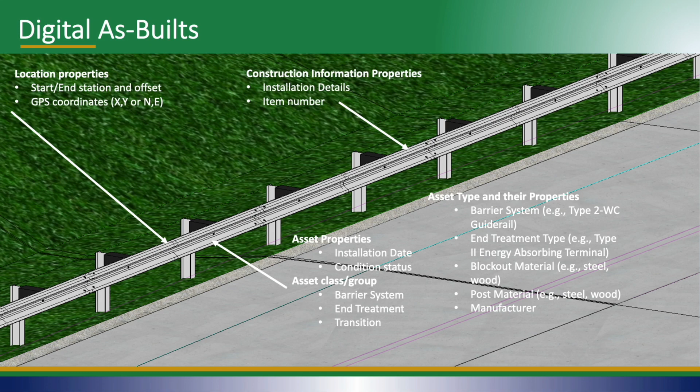The next group of pilots that we are getting into is the existing ground confidence level, also referred to as EGCL, and roadway authoring. This is where we are updating our survey requirements, looking at what those requirements are to produce a model quality level survey that we're going to need to build upon. So you'll hear the term data fusion. Data fusion is where we're taking various types of survey and combining it into one to, again, produce that model quality survey.

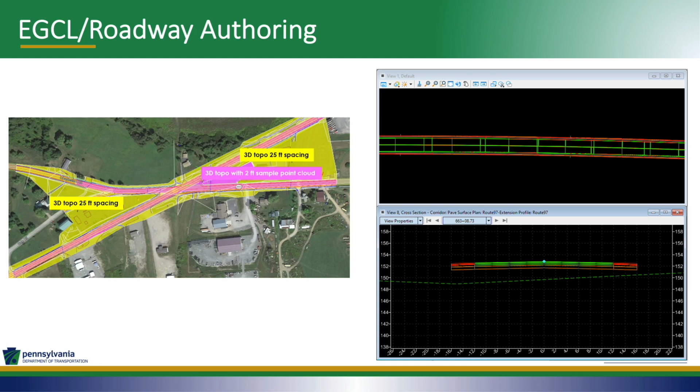There are various software packages that the contractor and inspection forces will be able to utilize. Working with them, we will be able to provide support and recommendations as far as how to use it and walk these projects through as we are advancing these pilot projects. These 3 pilot projects will be in construction in the 2023 construction season.

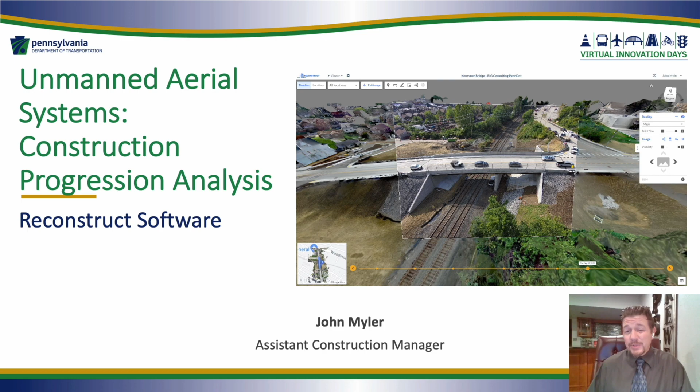Welcome everyone, and thank you for attending today. I'm going to be speaking about unmanned aerial systems and their use for construction progression analysis. In this particular case, we used the Reconstruct software system. My name is John Myler. I'm an Assistant Construction Manager in District 11, and I hope you find this presentation interesting and perhaps maybe useful for you in your own projects down the road.

So, you may be asking, what is Reconstruct? Well, it's a web-based software system accessible via any web browser. And what they do is they'll incorporate various aspects of your project into the system to present you some pretty cool features. So one of the things they'll do, 3D models, plan sets, incorporate those into the drawings, your construction schedule as well, drone flights for project record taking, and I'll talk a little bit more about where those drone flights come into play. And they are particularly instituted into vertical construction at this point, but they're looking to get into maybe some more of our construction.

So they also have a 360-degree camera that you can go around and take photos of a site with as well. So once you have all that information inputted, it can make a viewable 3D model in real-time space. So they can also overlay this with, say, Google Maps, and your project will be located, and that model will appear in your 3D world, for instance.

But also it's able to help us through construction with our progress. So you'll have a construction history, a timeline of details for your project. Again, you can integrate pieces of that 3D model. So if you're going to build piers, you could see where those piers are supposed to go in that real world photograph.

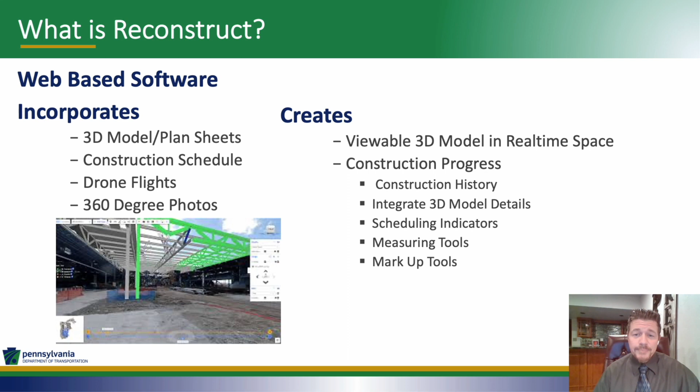And then you also get some measuring tools. So those are neat, and I think will certainly get better over time. And then also some tools to mark up the photos as well.

As I previously mentioned, we're currently using the software on 2 projects here in District 11: the Kenmawr Bridge Replacement Project and the McLaughlin Run Roundabout. At this time, we're only capturing drone flight data. We don't have a 3D model for either one of these projects.

Obviously, we are headed in that direction in the very near future, so I can definitely see the potential of how that's going to play into this software in the future, and the benefits that we'll gain from that as well. And I'll talk about that in a minute, how we're going to at least get the scheduling incorporated into the McLaughlin Run Roundabout.

The other item to think about here is our potential return on investment for these services. We can reduce the need for site reviews, being able to look at the progress of the project from a remote location. You get improved project completion by really seeing how the project is progressing in real time with indicators that maybe aren't there in a CPM schedule for folks to really see.

You also get a good construction timeline. You can snap through those various flights and see how the project has progressed over time. You get some quick calculations for difficult measurements like volumes, and that technology is only going to get better with Lidar scans and things like that over time with the drone flights. And then obviously you'll get some really good as-built records because you can go back and review how the project was put together over its timeline.

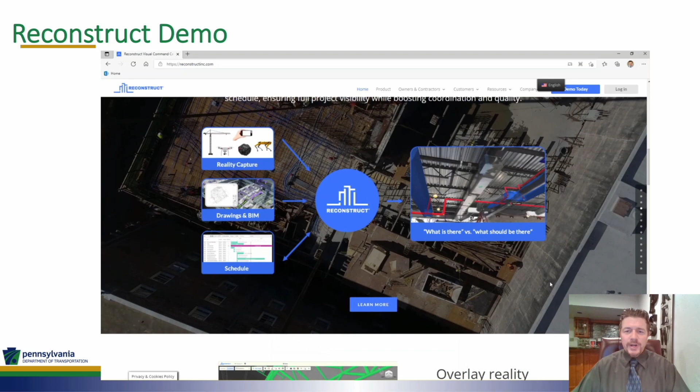Okay, so here we're in Microsoft Edge. There's the website, reconstructinc.com. Anyone can go here now, and they've got some nice videos and demos of their software on their homepage. You can see what it can do with models. They also show the 360-degree camera, and integration with schedules. And lastly, they have their return on investment details and some success stories.

So with that, we'll go ahead and log in. Hit the login button, enter username and password, and log in. It'll take you to your project portal screen. So we've got Kenmawr on the left and the roundabout on the right. We'll start with Kenmawr here. It'll take a second to load. It's a lot of data on the right there. You'll see the indicators of how that data is loading into the system.

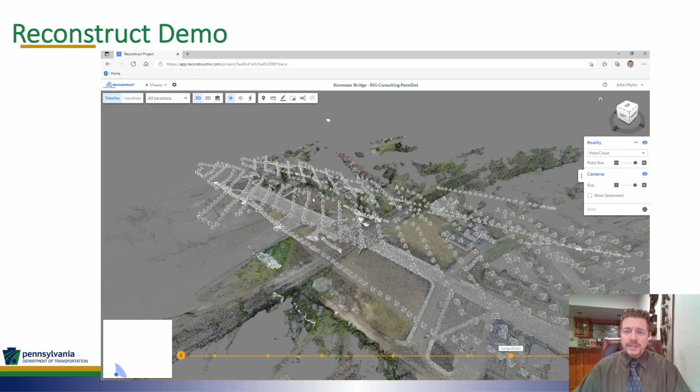Really what it's using is the photo rendering and point cloud system overlaid on the Google map. So here's the Google map on the left showing all the drone flight details. Across the top here, you have some toolbars that you can use, and I'll hit on some of those items. With that, let's zoom in. So here you can see a photorealistic 3D model.

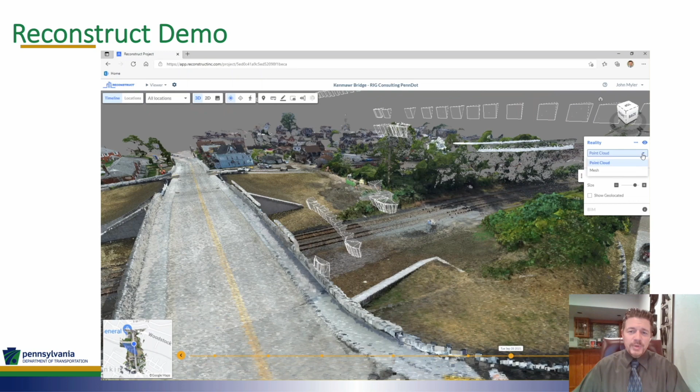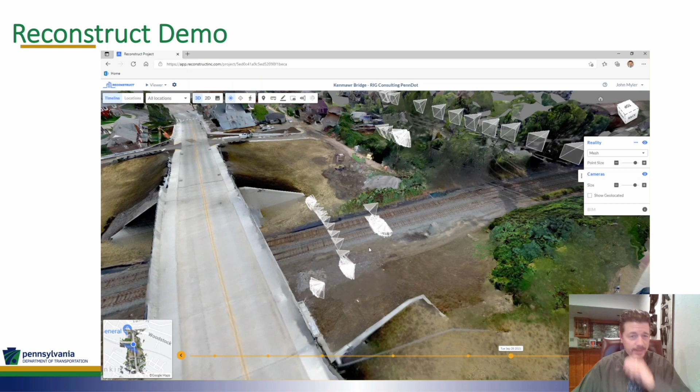Pretty cool stuff. The project was almost complete at this point. We're nearing completion now. There's also this mesh form, so it can take the photos and overlay them on surfaces to make it a little more photorealistic. So it's nice information there as well.

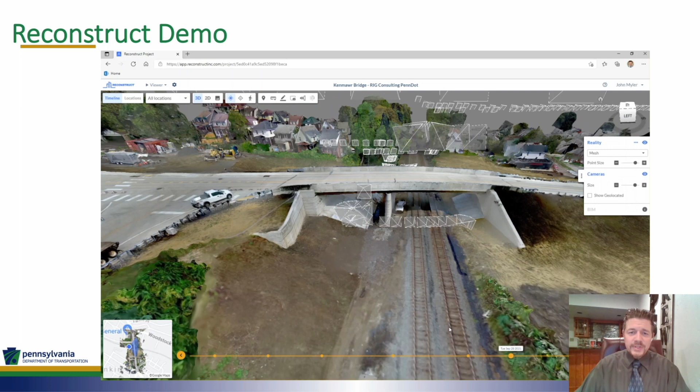These pyramids are actually high-res photos taken by the drone. In these photos, you can zoom in on them. So here you can see very high resolution, great quality photos taken from the drone flights. That's what it uses for some of that mesh overlay to make it photorealistic. So again, different angles, things like that, it can turn out pretty nice.

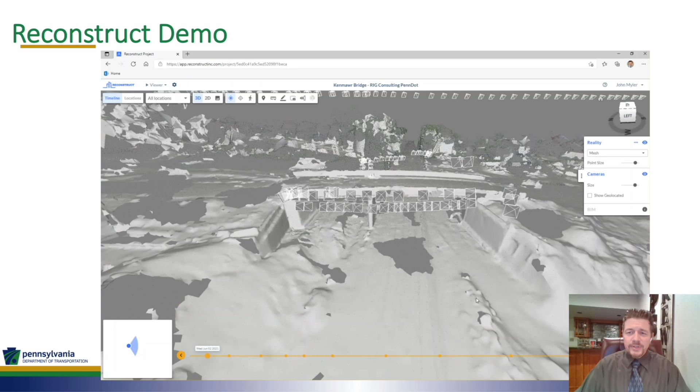Also across the bottom here, you'll see all the different yellow dots. Those are the different drone flights over time for the project. I'm going to go back here to June. That should work. So in June, we were just wrapping up completion of the bridge, getting ready to open it to traffic. Let's see here, the mesh doesn't look good. Let's do point cloud.

Okay, let's pan around here. So there was a temporary bridge, an Acrow bridge we used next to the new bridge. That's now gone. Let me go back to, let's see, February. That should work.

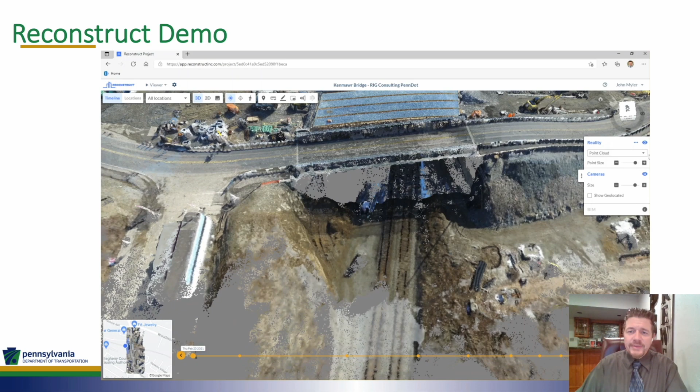So here in February, you'll be able to see the Acrow bridge next to what's going to be the new bridge eventually. We had to maintain traffic throughout construction. So again, really kind of cool photos here. Again, you can see material on site, equipment on site, good information to have throughout the life of the project.

Try the mesh here. Yeah, I don't think the mesh likes the temporary bridge. But something else here. Let me fly over the bridge, show you some details on that as well. Let's try this photo. Nah. Try it again. No, let me try another one.

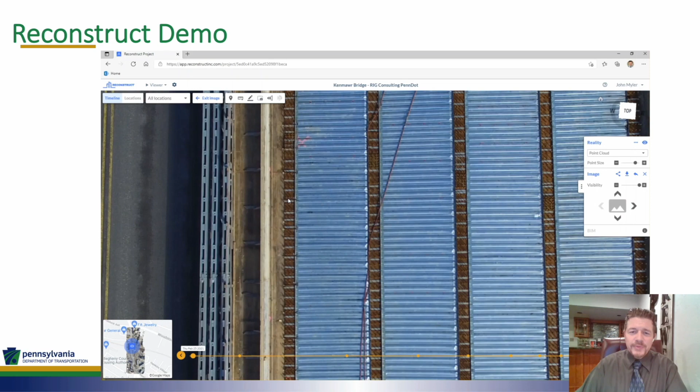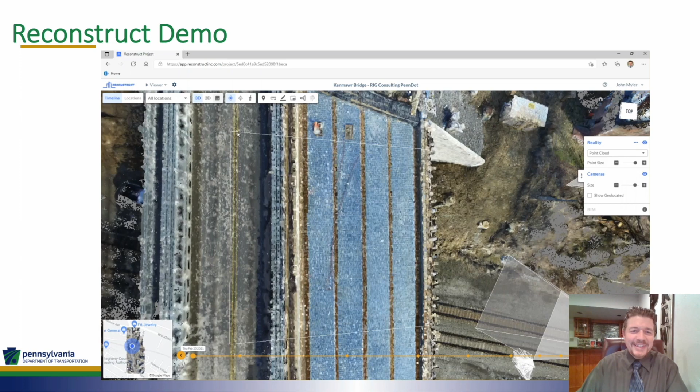There we go. Okay. So here over top of the bridge, again, you can see the detail. Those are the straps for the tension zone of the bridge. You can really kind of see that. Don't be scared about the rusty top flanges there. It's Cor-Ten steel, so we didn't miss something there on the project. And then the Acrow bridge next to it as well. It's really kind of some cool stuff there.

With that, scroll down here to the side. I'll show you some of the markup tools that we have. Here we go. So you get a little toolbar here with various colors and shapes and freehand items you can draw on the model and photographs. You also get a text block here, so you can put text in if you need to. So that's some cool stuff there.

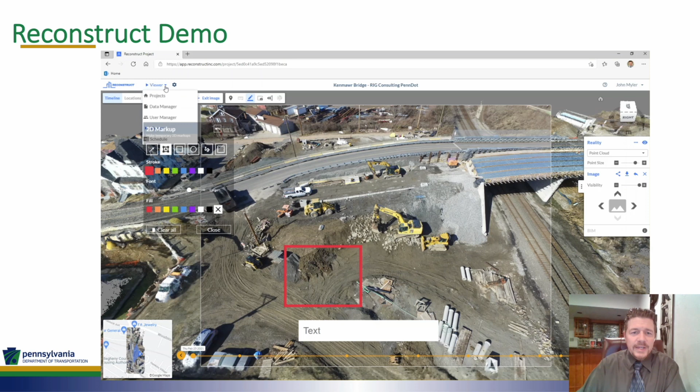And then also, let's see, here it is. So also you can just zap right to the image and it'll overlay that stuff in the image for the area that you're at. It'll find the closest one. So again, kind of a cool little tool there for you to use. Measuring, I'll show you on the next project, and let's just switch over to that now. So projects, okay, roundabout.

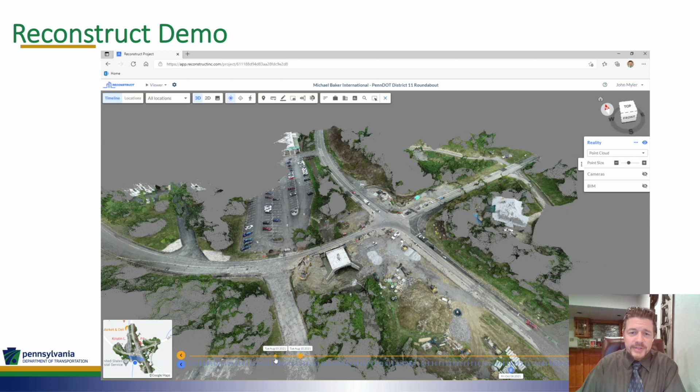So this project's very early in construction. We actually only have 2 drone flights at this point, but we're going to continue on here for another season. So we'll have a lot more flights as this project progresses. First flight. So this was right before we were setting a Con/Span, and then right after we set the Con/Span over a creek. Again, you can kind of see how this is all overlaid.

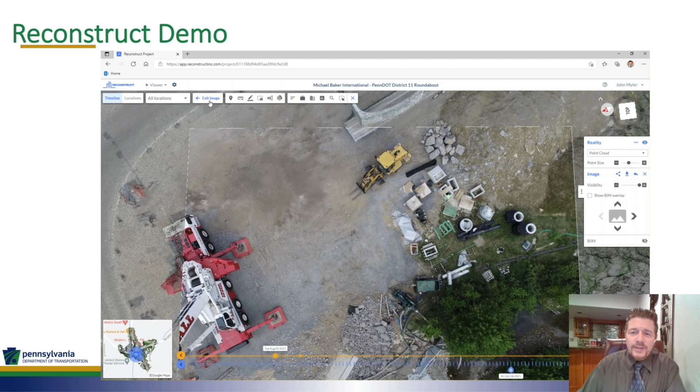Again, the map on the left side, and we have specific locations through here that are actual surveyed hard spots that don't move, and that's going to help us with the measuring that we didn't have on the Kenmawr project. Just flying in some photos here. Again, you can see the high quality, and you can see materials on site, equipment on site. See the arches over there on the far side.

Let me see if I can get the mesh. Might not work here because of the stone. Let me try going to the second flight maybe. Yeah, I don't think it likes the mesh here. Get the point cloud, try one more time. Yeah, okay, mesh doesn't want to work. So let's just go back to the point cloud.

I'll show you, there's a stockpile there. I'll measure around the area of that stockpile. So click the measuring tool. Here's all your measuring tools. You can see various items that you can use. One of the nice ones is going to be that cut and fill volume. When we get more survey data as the project goes on, we'll be able to even see the volume of this pile. So here you can click multiple points.

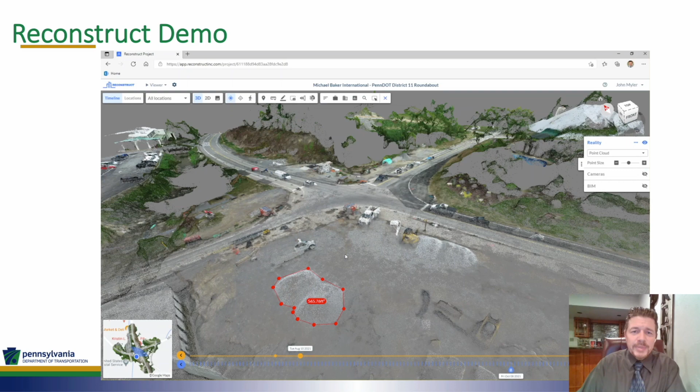It's going to grab all those points around here and give us a square foot of it. So there you go, nice quick little feature there to get that measurement. Let me go up and exit here. So there you go, there's your total square footage for that little stockpile there. And that stays kind of on the screen, so it's nice. You can pan around and it won't move away for you there.

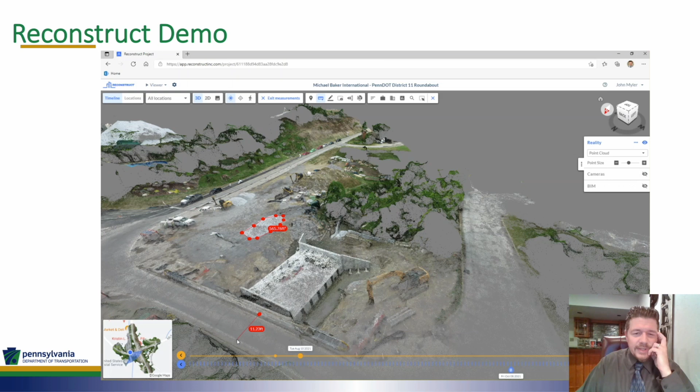I'll try and take a measurement over here. That should be good. Let's go ahead and measure the width of the road. We had a single lane alternating traffic. So this is a narrow section of roadway here, just over 11 foot. So yeah, you can see just over 11 foot there. I might be off the barrier a little bit, but again, nice little measuring tool. Just for information, if you want to grab a quick measurement, you can do so on a project.

Okay, you also get your markup tools here. So just like on the other project, we can mark things up if we need to. So that's nice. What else? Timeline. Okay, here down at the bottom, this blue indicator, that's going to be our schedule. So we're starting to load a lot of that in now to use that to progress the project through construction.

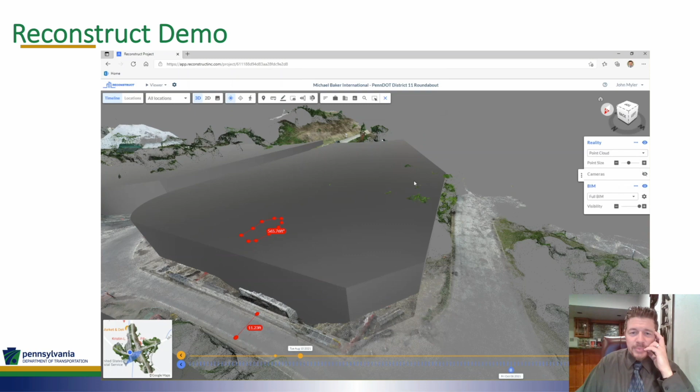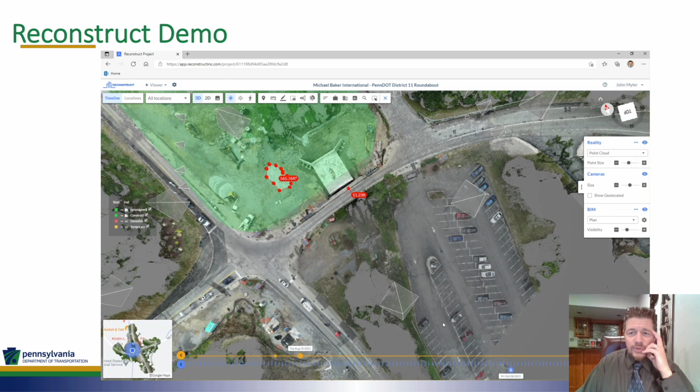So as I lay this over the plan, there it gives you an indication that we're on schedule. So the green shows we're on schedule. And obviously, if we weren't, that would be shaded red, showing that we're behind and where we should be moving forward. So again, nice way to show you how your project is progressing.

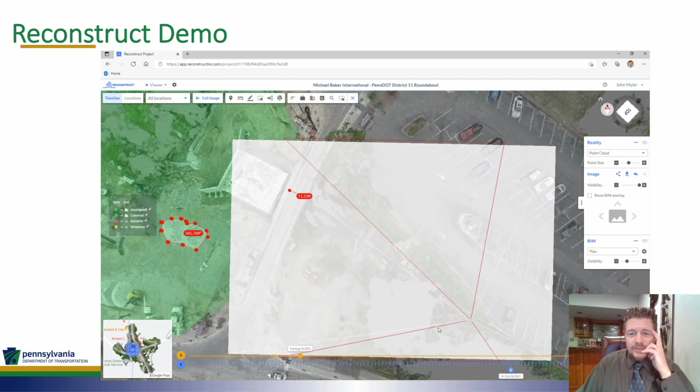Again, turn on the cameras here. So again, those pyramids, we've got a bunch of high-res photos. Let's see if I can check that measurement again. So even in the high-res, you can zoom in and take measurements there as well. So let's see, try and get white line to white line here. Yeah, so looking, again, we had 11-foot lane, so you have probably 10 foot between white lines there.

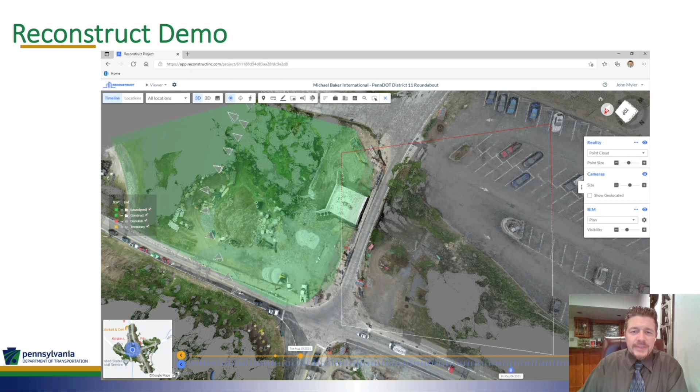So again, cool tools to use. And again, I think once we get some more flights in, we'll be able to get better survey data for measuring volumes of cut and fill and stockpiles. So look forward to that.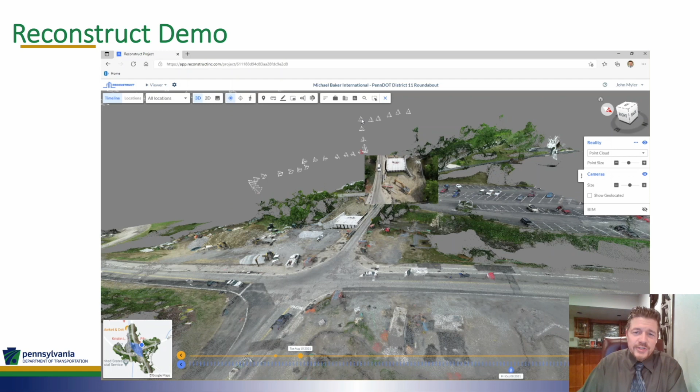Just finally to wrap around here you can kind of see those pyramids. That's the flight of the drone as it worked its way around on that given day. And you can see the elevation changes and the location changes as it goes around. Click any one of those photos for use. Sorry if some of those are kind of small to see doing that, but again, I think we're going to have some great potential coming out of this in the very near future once we go planless.

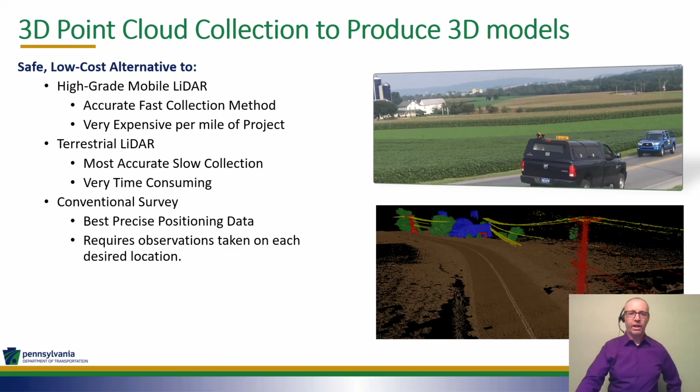The reason we're looking at this, we now collect a lot of LiDAR on the roadways, but we use it with really high-grade mobile LiDAR systems through our consultants. Those units can cost up to $1 million to purchase, and they're very expensive for us per mile for data collects. We could also do it through terrestrial LiDAR. It's going to be even more accurate, but it's very time consuming to move those terrestrial LiDAR stations along that roadway, collecting the data you need.

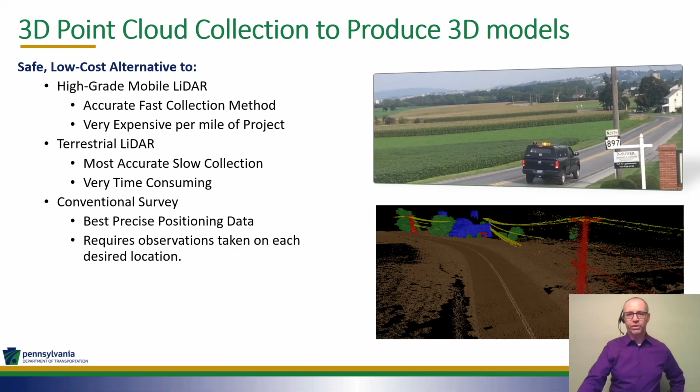And of course, another thing that we're looking at is utilizing conventional survey, but keeping those surveyors out of that roadway, right? Keeping them off that double striped yellow line, off those road edges, and really try to utilize the technology to keep our surveyors safe and get their services for the off-road data where LiDAR really struggles in vegetated areas.

As part of our SLAM evaluation, we also wanted to look at 3D point cloud collection for digital as-builts. So in the image you see to the upper left, that's a roundabout that they built for a new welcome center in District 5. We were able to utilize that ZEB Horizon scanner by hand, walk around that roundabout, pick up the details. I mean, you can see the paint stripe, you can see the center, and of course, we'll be able to rotate around in 3D and see all the details in there.

We also were able to collect on a steel girder bridge. We've been requested through photogrammetry to do many captures of historic bridges specifically with our terrestrial scanners. And it's very time intensive to move those scanners from position to position to try to get all the details specifically in those steel girders. So with this hand scanner, we're able to take that through and basically paint what you see. You're able to move it around and paint and get that superb detail that you see in there.

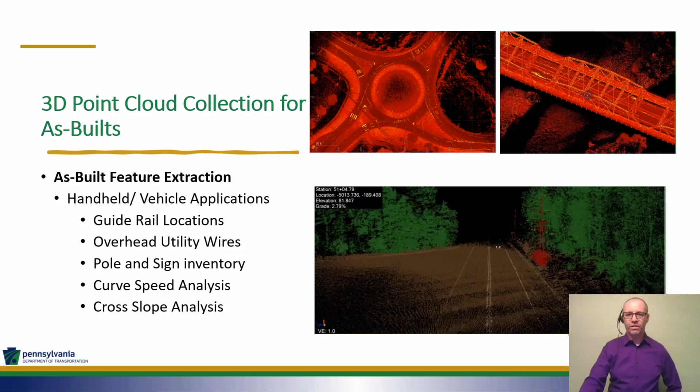So as this animation continues to roll through, you'll see a little icon of a surveyor standing in the middle of the road. And again, one of the things we're going to do is utilize this for safety. I think it's really easy to see how driving these through the roadway is a much safer alternative to having personnel standing in the middle of the road.

And the third aspect we want to look at is 3D point cloud collection for asset management. So we were able to take that scanner down to Fort Hunter State Park in Harrisburg, and you can see in the photo in the upper right a covered bridge down there. And we're able to take that scanner again, handheld, walk through there. You can see the details in the image below.

That's actually the point cloud rendering that we're able to produce. A lot of detail. It can get a little bit artistic with these. One of our technicians did, and also in the animation that you see that's running now. Okay, and we're able to walk through there one time, one complete scan. If we were to try to collect this with our terrestrial scanners, it would take many setups to show the details of those beams and to get everything collected. The SLAM technology really offers us a great opportunity to move through here once and done and get the scan that we need.

Another asset that we looked at was a culvert in District 8. So as this animation kicks off, you see we were able to scan on top of the ground, show all the context that's needed to be there, utilize that to geolocate, georeference this scan in space. As they tilt up, you can see the culvert run under the road. And with our software, we're able to cut away then all that roadway surface. And you can see in the image to the left how you're able to cut away that culvert to see the detail. You can see those pipes. You can look in there and see deterioration. A lot of detail comes out of that. On the unit too, there's also a video scan that occurs while you're collecting the scans.

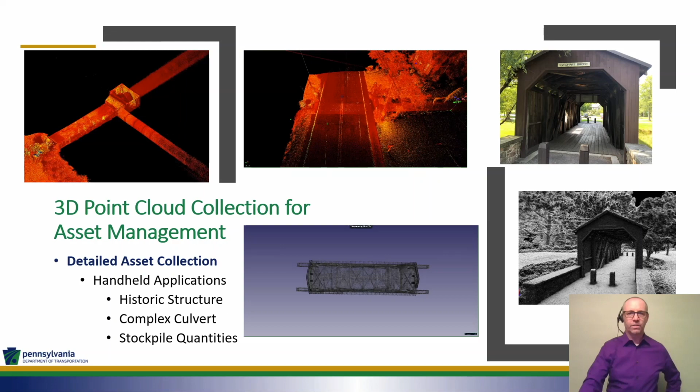So we saw some really great advantages to this scanner right off the bat. It's lightweight, easy to use. We can mount it to a vehicle. We can transfer it between survey crews or even different departments depending on the applications. We can access hard to reach environments, or as you see here, this is a railroad crossing that's moving now. The detail you can get on something like that.

This is that welcome center up in District 5 that I had mentioned. We actually walked the outside of this and a bit in through an outdoor eating area. And you can just see the details that the SLAM is able to pick up. The last animation is of a pedestrian walkway. We scanned that by hand. And again, you can take these scans, you can georeference them, you can pull them into your projects and be able to have a really good detailed digital as-built of what's there.

So as part of the evaluation, of course, there's some limitations that we ran into. The unit must be utilized, whether handheld or vehicle mounted, in a closed loop scan. And those scans must be limited to about a 20-minute duration. And as we were putting the scans together, we saw some of the point clouds getting some divergence or drift. So in the image to the upper left, you can see how the bottom scan is actually what we want to see. And as part of that drive, we started to get some drift in that upper scan pulling away and lifting away and moving off to the left.

It really requires a vertical feature-rich environment. So poles, signs, buildings, and even that tree canopy actually is a good feature. We didn't realize that at first. I thought that would be a little noisy and poor, but actually those trees help out a lot.

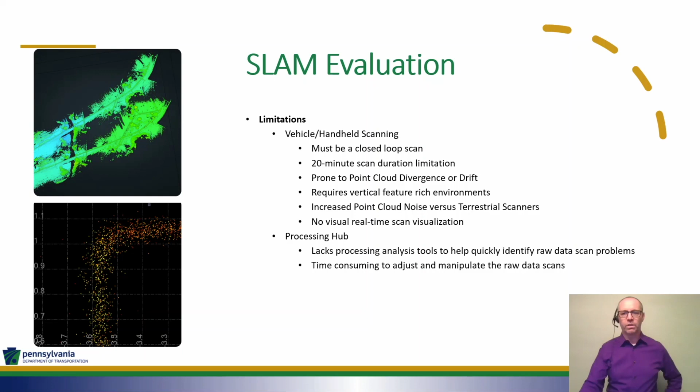So we're submitting our findings for the FHWA SLAM evaluation now, but we also want to do some explorations of some other types of LiDAR and do some true comparisons to these. One of those being the Kaarta Stencil Pro. We've had them out for a demo. Topcon was able to bring out their RDM1 unit. It's a downward facing LiDAR scanner. And we're hoping to set up a demo with the Trimble MX50. So, what is driving all this?

And the thing that's driving it is this new 3D digital delivery directive for 2025. And we're being tasked on the survey unit to provide much more data-rich, dense data sets, so that when you're doing your 3D modeling and your 3D design, you have that good dense terrain built from your survey.

The other thing is personnel safety. We want to keep everybody safe out there, and if we can do it through mounting these onto vehicles, collecting those roadway surfaces, we can utilize our survey personnel on the off-road data collects, getting those drainage structures, showing the ditch lines and the swales, and other things that LiDAR just does not do a good job with, especially in vegetated areas. So we want to best use our personnel and be able to deliver the products that we need moving into the future.

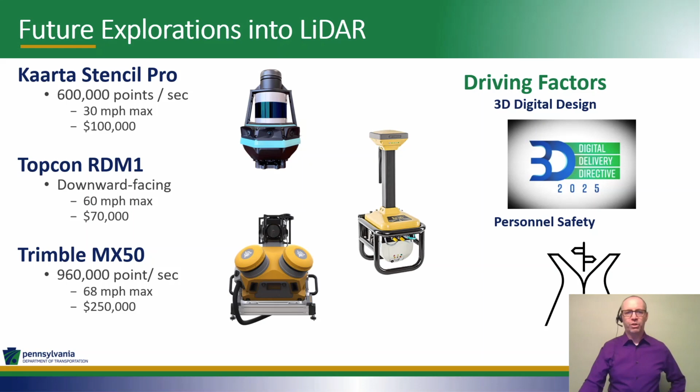The second part of this presentation, we're going to look at the Trimble X7. We were able to purchase a Trimble X7 through the Productivity Improvement Fund through PennDOT. It's a full 3D scanning system. This one has an 80-meter range with a very low noise level. So this scanner is getting back direct returns.

You're not seeing that 1/10 of a foot noise range. You're going to get 2.5 millimeters at a 30-meter range. If the scanner's 30 meters from that wall, you're only going to see divergence of about 2.5 millimeters. It collects at 500,000 points per second, and has a very tight relative accuracy of 2 millimeters. It has some mobile software called Trimble Perspective we're able to use in the field, and we're able to do our data analysis through the existing Trimble software that we have in-house.

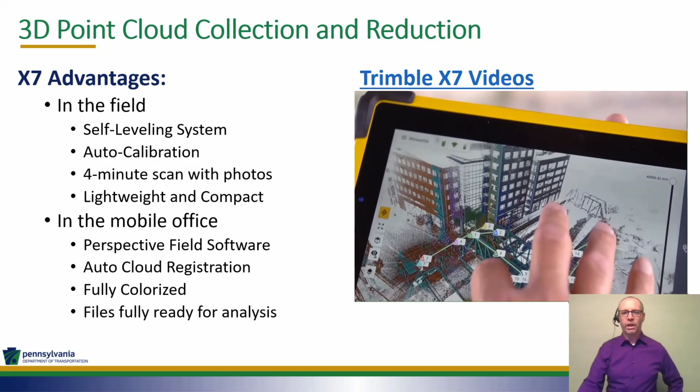So just looking at the 3D point cloud and reduction with the Trimble X7, I actually borrowed this video from the Trimble website. It'll show you the X7 and also some of the results and some of the field applications. But our main reason for acquiring this, it's self-leveling and auto-calibrating. So we can take that unit, go and set it up, press a button, it auto-levels and starts scanning. It can pick up your full 360-degree view scan with photos in about 4 minutes. It's lightweight and compact, easy to move, easy to utilize.

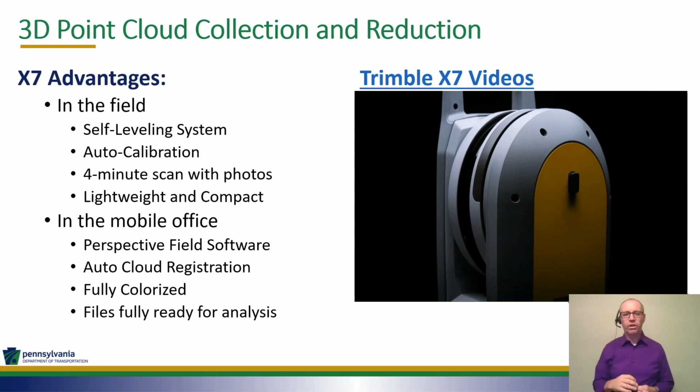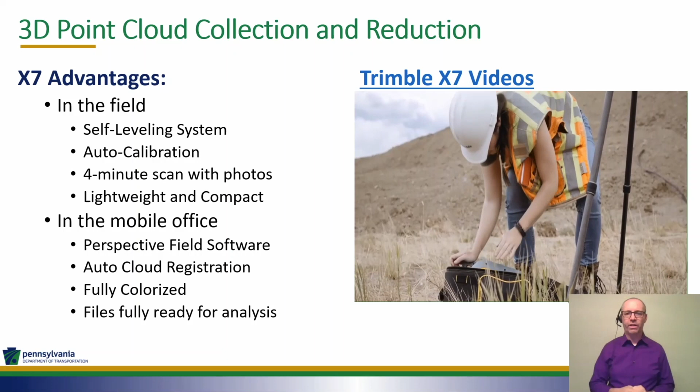In the mobile field office, like I said, on a tablet, we'll have that Perspective software. We can auto-register those clouds in the field. We can colorize those point clouds in the field. And the files that we have at the end of the day are ready for our analysis. We dump those into our other Trimble software products, and we're able to go and start analyzing those MSE walls. It's a great time savings for us. Great, again, on safety, keeping those folks in safer positions, being able to carry that lightweight scanner, much better than the old scanners we have typically been using on those collections.

So typically for workflows for this, we establish some horizontal and vertical control on those sites. We do preliminary base scans. And then in accordance with Pub 238 and our own Pub 122M, we do these in-depth inspections about every 10 or 15 years, depending on the wall. We then document and report any separation; you can see if those panels are moving in any way. You can see if the wall's moving.

We can do that through heat maps, cut and fill maps. And we're also exploring some other simpler deliverables, like Excel reports, that we can give directly to the bridge unit and those that are actually analyzing these.

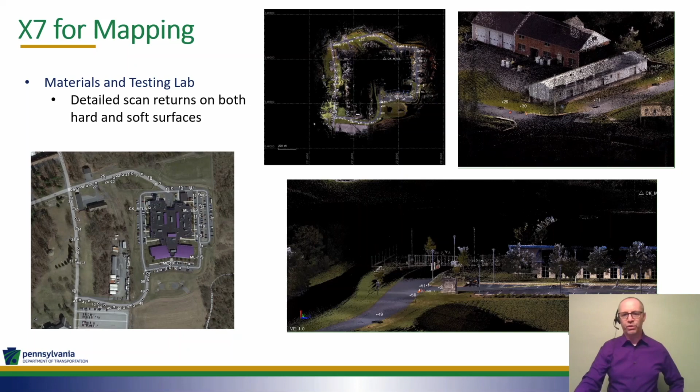This went very fast. At those 4 minutes per scan, they were able to go the whole way around the building and all the access roads where you see those numbers indicated, collect upwards of 50 scans in less than 1 day. Again, they're auto-registered, they're colorized. They want to move those into our other Trimble products. We can pull out the surfaces for those roadways. We can see the details in the buildings and any assets that are around it.

We very quickly realized benefits as soon as we got the Trimble X7. It's 50% lighter, more compact than the previous units we've been using. So we can really get that in and where we need it, keep the surveyors out of harm's way. It collects a large range of data, so we can be up close to that wall or pull back from that wall, however we need to get that. It's auto leveling, fast data capture, reducing our field time dramatically on these MSE walls.

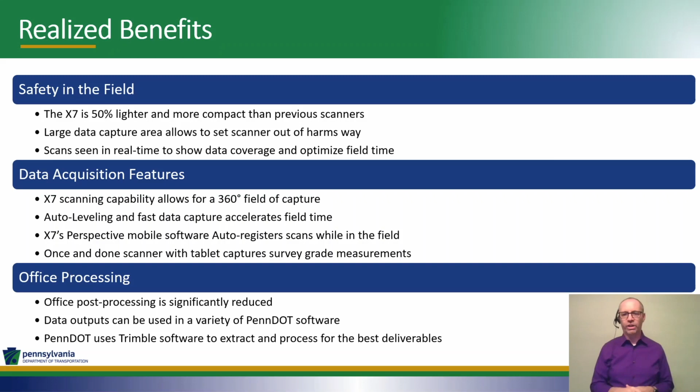The field software that we have on there, again, auto-registering those scans saves a lot of time back at the office. We know what we have right there in the field if there's anything extra we need to pick up. It's a once and done solution. The office post-processing, again, the amount that's done in the field, we then bring those LAS point cloud files into our existing PennDOT software to start that analysis, comparing those original scans that we got 10 years ago to the scans that we're getting today to detect any movement that may be occurring out there.

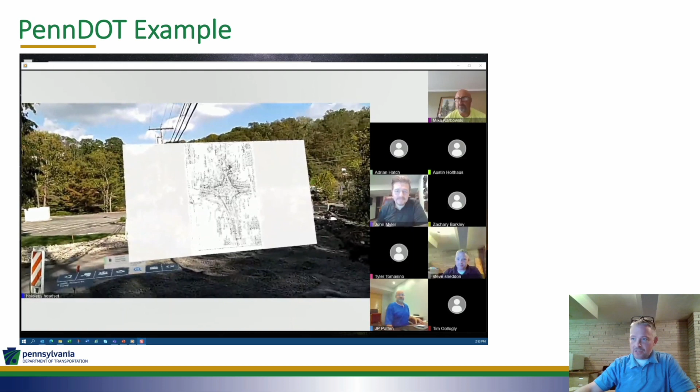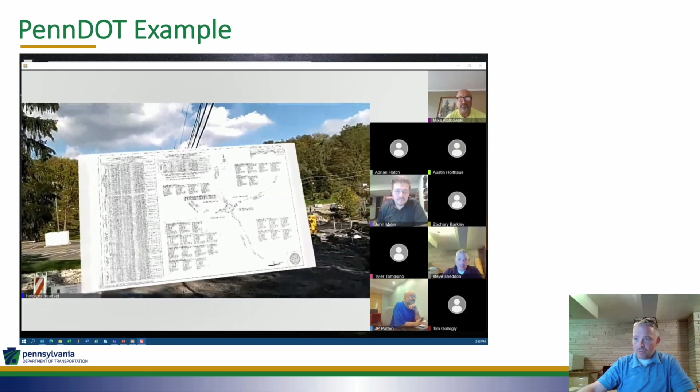30-25 station, looking station ahead towards the roundabout. North is to my left currently as I'm standing here. Just to give you alignment. So you want to shift to the next page?

I'll add one thing here. The audio is a little rough because he was shielding his eyes from the sun, not realizing that he was inadvertently blocking the microphone. So we learned from that.

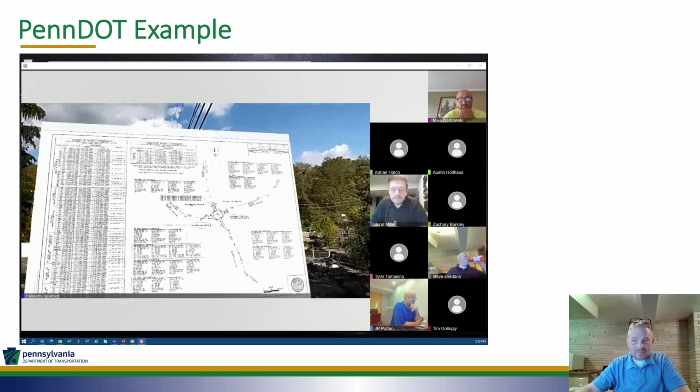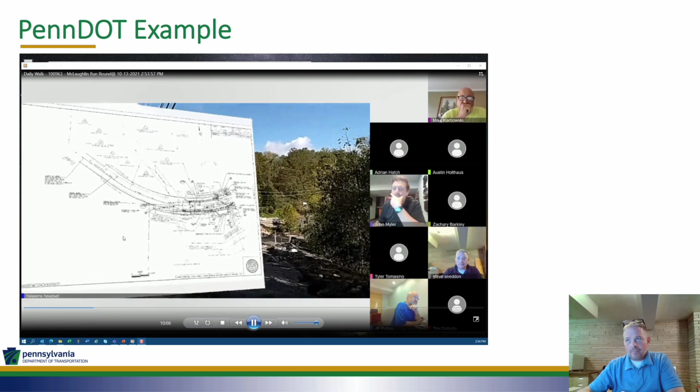So here again is our baseline, 3124 on my pointer. I'm about at 3125 on my pointer. And our targets up through here of discussion. You see the side road on the right of this plan set here. We're actually going downwards. That's actually a post office entrance. Pretty active. It's actually the most active post office in the county, probably. So many people come in and out of there. But that's kind of where I'm standing, right at 3125.

That's right there. So anyway, you can see what this looks like. You have the participants on the right live with the gentleman in the field with the plan set actually on site, sharing live information amongst ourselves. I'll try to get into a little bit more of the detail in the next slide.

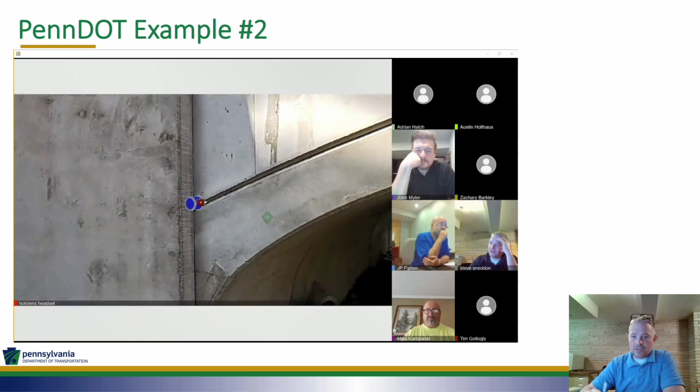Again, is it roughly 15? Okay, so here we are. We took the HoloLens, the AR HoloLens, down by the bridge, and we're going to show you a little bit more of the functionality here.

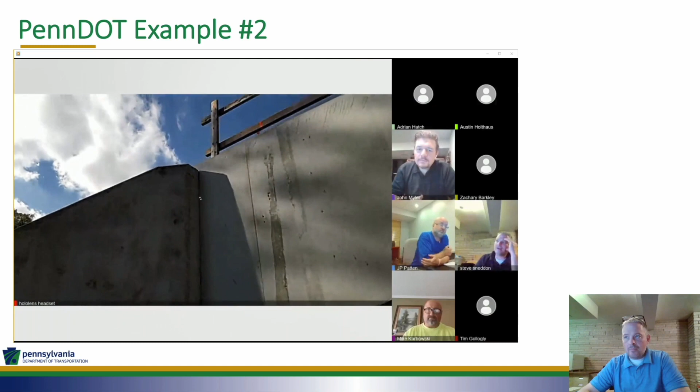Feet. Yeah, it's a 15-foot diameter, so about 7.5 to 8 feet in front of you, and then it'll remember that map around it up to about 100 square feet or so. So that's what we are pushing up bigger. We're making that map it builds over time larger, but it scans in front of you in about 7.5 feet, and it'll remember that, up to about 100 square feet.

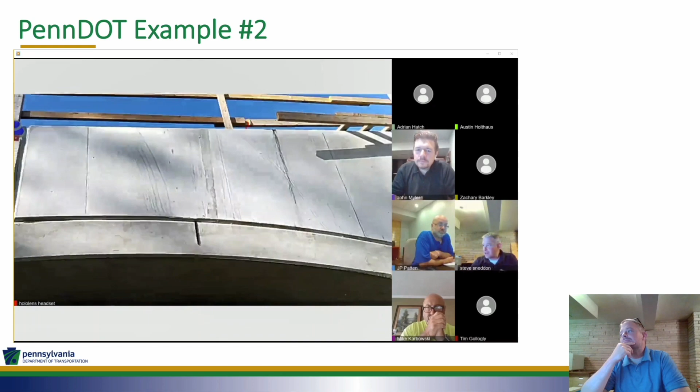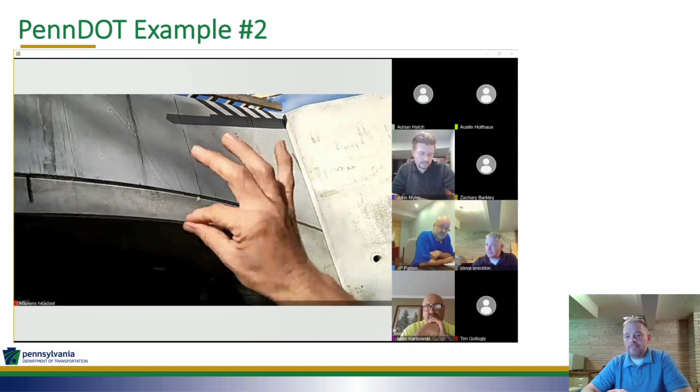So as he walks around the site, it's not storing the entire project in a 3D LiDAR model anywhere. Yeah, not yet. So you can think about it as it's grabbing a snapshot of the job around him in 3D. So when we hit the upload on this, we'll see how much of the bridge it caught.

Okay. So now for him. What you just saw was Mike was trying to snap some photos, or drop some pins, but he wasn't quite close enough for it to work. So that's one of the shortcomings as of now.

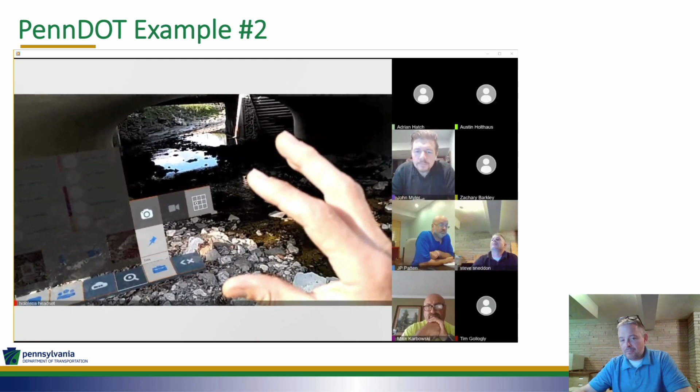To snap a LiDAR image right now, what's he have to do? Look at the bridge and click on the grid? Doesn't even have to look at it. So everywhere that those pins are, that's all going to get captured. Dropping a pin tells the headset, hey, keep track of where I just placed this. Because it's going to keep the markup accurate even on places where it doesn't have that in its immediate memory.

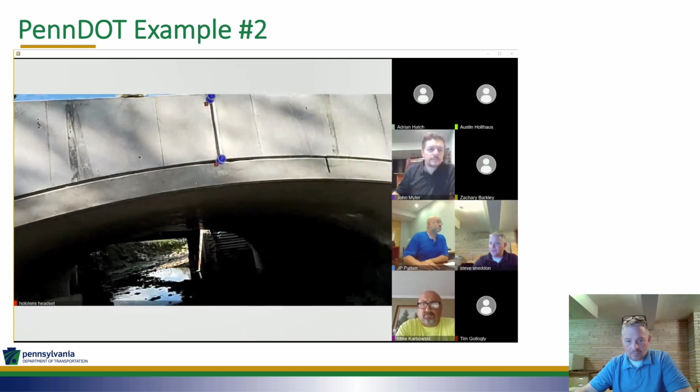So this is convenient. It drops the file right in the chat box. So I can just click on that, right? Yep.

Although I think that might try to launch you out of the call. Yeah, it tries to take you out. Yeah. I have to save as. That's a good note, though. We should make that download instead.

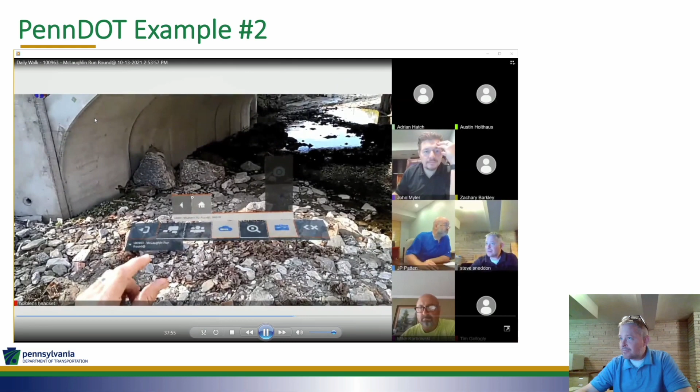And if you take a look at the folder, I'm going to turn your attention. Take a look at the file sizes. The first one Mike took was only 280 kilobytes. The one we just took is over twice as big, and it's got that whole front area of the bridge where he just put the push pins and all the dirt behind him where he was walking around. So if you were to walk down that bridge, drop some pins on the underhang there, get a good look at that, it's going to include that underside as well as all that terrain.

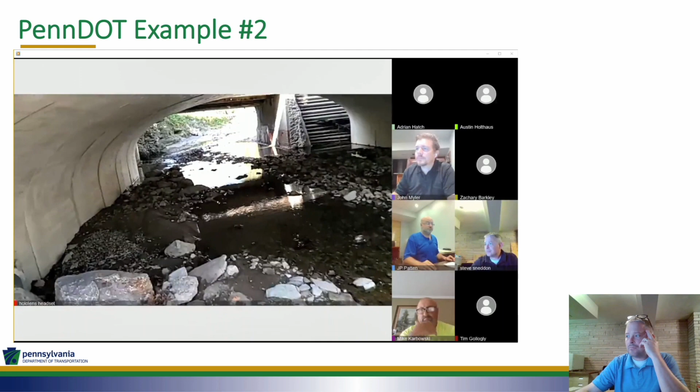The other thing, too, to mention, you don't really have to do the 3D scan until the end because it's building a mesh the whole time, and whenever you click on the grid, it's going to do the scan for everything that it's seen.

Well, that pretty much wraps up what we have so far. As I mentioned, we just got started with this technology. We just got it working literally days ago. We still don't have it fully functional. We're still not very familiar with the interface, the toolbar, just about everything. But I tried to give you a little bit of an example of what it could be used for, and I agree it was a little rough. I hope you forgive me, but didn't have a lot of time to pull this together.

So with that being said, that's all I have for this today. As we experiment with this for the next several months, I should have a much more comprehensive presentation to provide at the PDW. So with that, I'll leave it open to any questions. Thank you.

Hello, my name is Nicholas Schroeder. I work in the Bureau of Project Delivery, Bridge Design and Technology Division, Structural Materials section, where we oversee operations for fabricated structural steel and precast members. Today I'll be discussing some pilot projects we have ongoing as part of the I-95 corridor, those technologies being virtual inspection and phased array ultrasonic testing.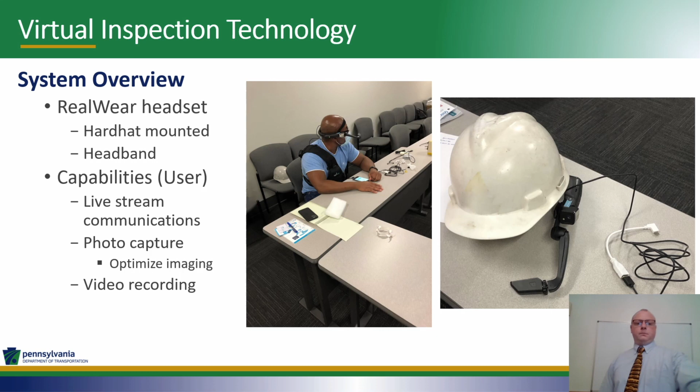When capturing photos as the inspector or a remote user, the system is programmed to optimize the image regardless of available bandwidth, and in some cases will sacrifice the live stream communication to enhance the photo capture.

The virtual inspection system is being evaluated for all aspects of fabrication and to identify potential problem areas for remote users. Areas such as measuring tight fit-ups and using other gauges or digital displays with high potential for glare would be some examples. To date, the system has performed well in these areas with the exception of troubleshooting some connectivity

issues. The system allows for increased productivity by allowing project managers to quickly gain an understanding of issues via means of seeing what an inspector sees in real time. This eliminates to some degree the timely back and forth photos, phone calls, and emails required to typically gain a good understanding of an issue.

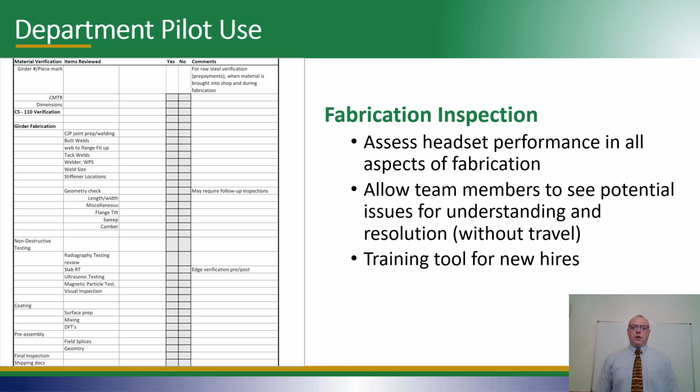This is one example of time savings to the department and project staff. Additionally, allowing new hires to attend these virtual inspection conferences aids in their training process as well. The previous slide mentioned time savings in terms of efficiency for problem solving. As an inherent bonus, this also eliminates wasteful travel and other associated costs.

Fabrication shops are spread throughout the entire country, with the furthest active shop in Omaha, Nebraska. Having a system like this in place at all facilities would allow the project manager/engineer to virtually visit multiple shops in a day's time to observe issues and check up on the status of various projects. Or the system could be used for routine quality assurance audits.

From a safety perspective, the system limits the number of personnel required to be in the work zone to observe activities. Subsequently, this reduces the potential for hazards. It's also important to note the system was in place prior to COVID, so adaptation to COVID-19 restrictions, while still maintaining a level of communication and oversight with our inspectors, was very easily achieved.

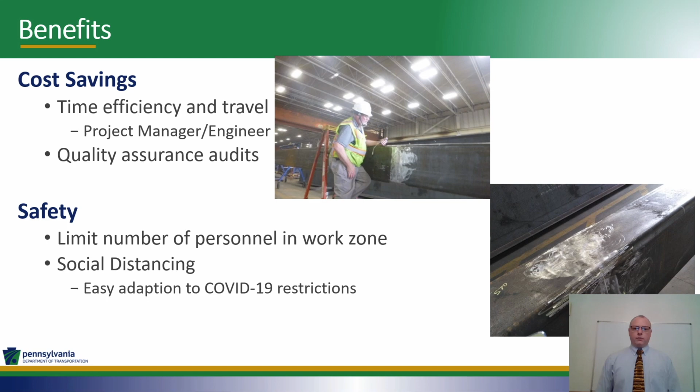Throughout the trial period, and like with all good pilot projects, numerous lessons were learned about the use of the systems and its operations. Since the system works on a web-based platform, maintaining a stable internet connection has been the biggest challenge. In order to combat this issue, Wi-Fi boosters were placed throughout the fabrication facility. The developer of the web-based platform provides frequent updates that often cause issues when attempting to join a live stream for the user.

As previously stated, the system is tethered to a cellular phone, and the cord connecting the phone to the RealWear headset has been known to loosen and drop the user from the live stream. It is recommended that targeted inspection activities be a focus of using the system, as the battery life of the phone is roughly 1 to 1.5 hours. The system does allow for inviting external guests by email notification with a link to join. However, we have experienced issues where the emails were filtered to the spam box or had a latency to arrive.

The two biggest questions before using a virtual inspection system were related to image and sound quality. From a live streaming perspective, the image quality is highly dependent on the network connection, but also on the inspector's movement. This requires the inspector to move a little slower while maintaining a still head. Capturing photos is also dependent on dynamic movement, which causes blurriness of the image, as would occur with normal photo capturing. It was discovered that videos cannot be recorded while live streaming is occurring, but the image quality has been excellent in the videos we have recorded.

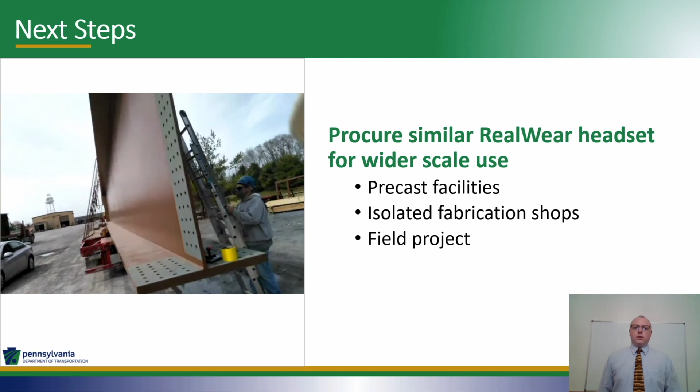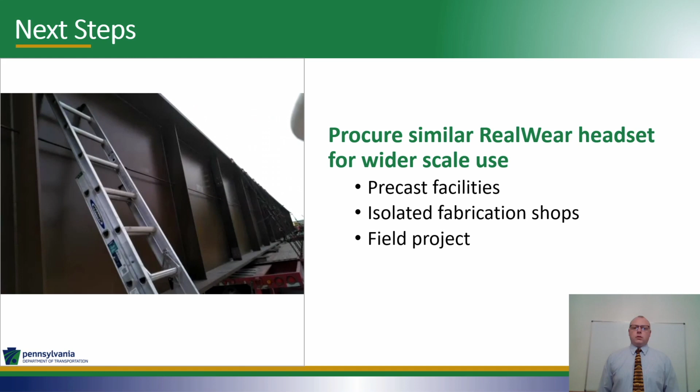As part of the department's commitment to advancing the use of technology, we are looking to procure a RealWear headset of our own for use in a broader environment. Testing the system at precast facilities and facilities that are a little more isolated, and also field sites, are the primary focus points for further evaluating the use of this system.

Switching gears slightly, but staying with the theme of digital delivery, the department has been piloting the use of an advanced non-destructive testing method in phased array ultrasonic testing. The method utilizes the same principles and theory as traditional ultrasonic testing, but allows more functionality and interaction with the data by virtue of testing with more than one piezoelectric element. The key benefits of using this method over the traditional are advanced visual aids, reduced inspection times, and the ability to maintain a permanent record.

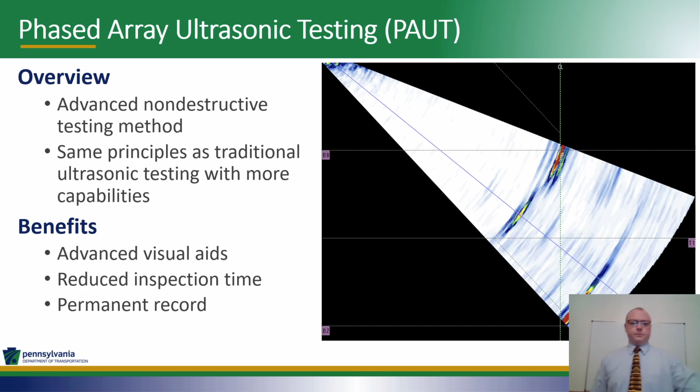This technology was also proposed for use via special provision for non-destructive testing of critical welds, such as a welded web and flange splice, which traditionally are tested using radiographic testing methods. A key objective of this pilot is to help aid in the determination of using phased array ultrasonic testing in lieu of the radiographic testing method.

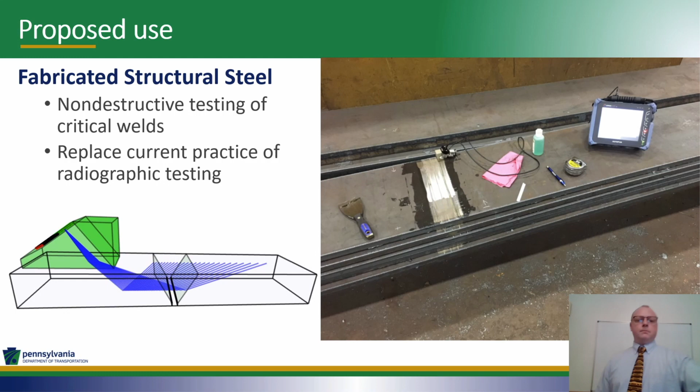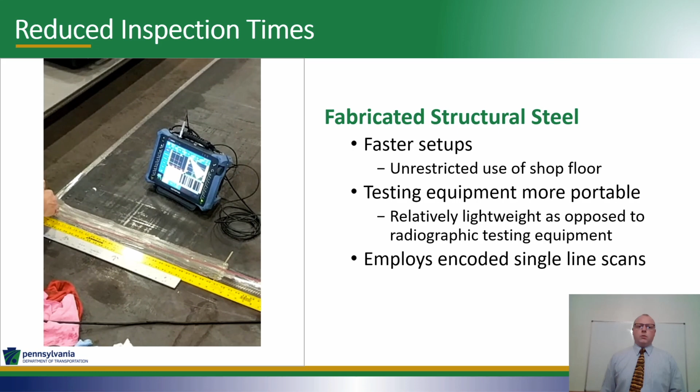When used in lieu of radiographic testing, there is the potential for reduced inspection times as the system is faster to set up and does not require isolating an area of the shop due to radiation hazards. Radiographic testing is highly dependent on radiation penetrating a member to reach a data collector. In the case of thick members, this can take quite a bit of time, and the ultrasonic testing process is much faster. Radiographic testing equipment is typically 50 to 70 pounds in weight, whereas the ultrasonic equipment is much lighter.

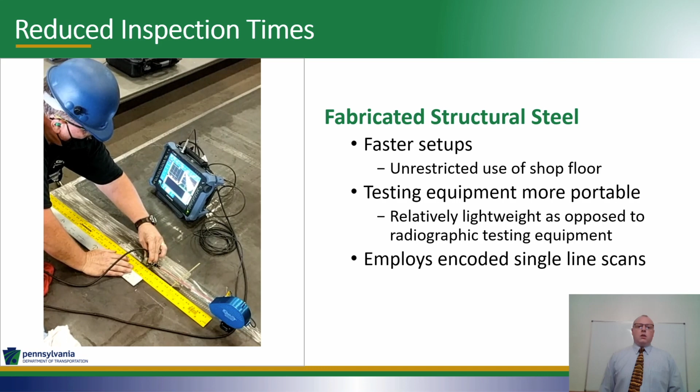The phased array ultrasonic testing process using encoded line scans as seen here in this video allows for collection, storing, and archiving of data for interpretation at a later time. The encoded aspect in the data collection is in terms of distance or location where the data was collected on the weldment. The current radiographic testing process maintains a permanent record in the form of a radiographic image, or it might be easier to visualize as an X-ray. Since the phased array process is heavily dependent on having additional advanced visual aids, this process maintains that status quo with the encoded line scans as they are archived as a permanent record.

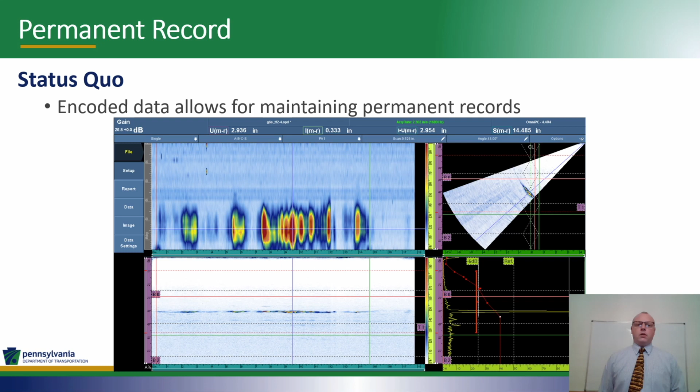The special provision for this technology was written to include assessing another component of the phased array testing process of artificial intelligence, or automated detection technology. This technology is already a market available software, so there is no need for program development. The software requires that the data be in an encoded format and is post-processed. During the post-processing application, the software evaluates the data for any quality issues during collection that may render the data unusable, and then evaluates the data for potential defects. If defects are located, the software will automatically flag them and perform sizing applications to report length and location.

By using this software, the time for a technician to analyze data is cut tremendously. As an example, it may take a technician 5 or 10 minutes to analyze data from one welded joint, where the automated detection software could complete the same task in under a minute. In large volume shops, this could translate to a huge cost savings. The use of this software also helps cut down the ambiguity of human error in the interpretation process.

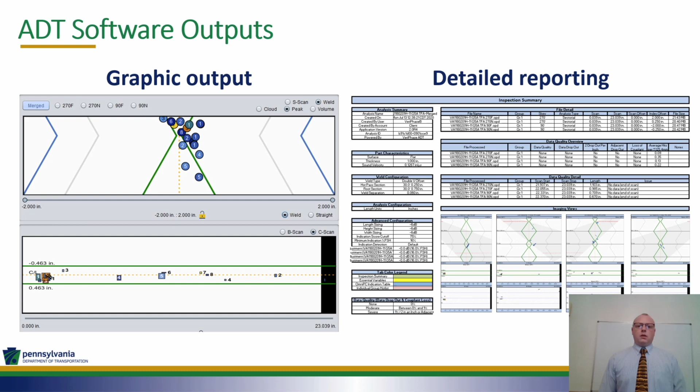The automated detection software has two main software outputs. One being a graphic output on the left, which shows a section and plan view of the weldment with flagged areas of potential defect locations highlighted for further evaluation. The second output is a detailed spreadsheet with all the information and parameters for testing, data quality, defect location, and more. These features used in combination with the original data greatly aid in the overall documentation process.

As a result of this pilot project, a few indications have been flagged requiring additional evaluations, but determined to be caused by external influences such as ponding of the couplant material on the surface of the part, which is required to transfer the ultrasonic wave from the transducer to the test specimen.